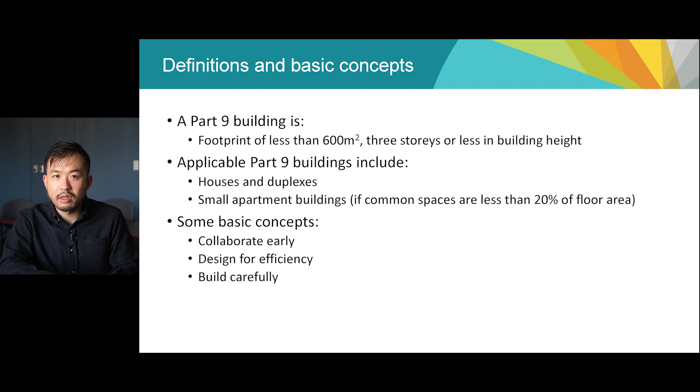An energy-efficient design has windows and doors in strategic places, adequate ventilation, good insulation, and heating and cooling capacity that meets but doesn't exceed the needs of the home. During construction itself, mind the details so there are fewer thermal bridges and air leaks. Seal those air leaks up and watch your corners, junctions, gaps, and studs to reduce thermal bridging. Don't let heat get conducted out of the house.

Here's a summary of the proposed changes for Part 9 buildings. The first is a new prescriptive option for Step 3 only. The second is a series of smaller changes for both harmonization with national codes and additional airtightness testing options aimed for builders of smaller homes. The third is the opt-in building carbon pollution standard.

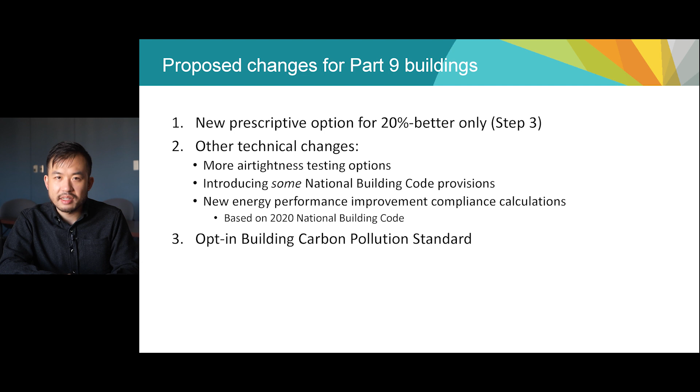Before discussing the differences, I want to clarify what's staying the same. Existing performance-based metrics for steps 3 to 5 are mostly unchanged. There are some minor changes to the metrics, along with some shuffling of tables and new wording to harmonize with the National Building Code. The name of Step 3 and where those requirements are in the code may change, but any builder currently building homes to steps 3 to 5 should transition smoothly to the new requirements, as the techniques and designs are still applicable.

For builders building to the base building code, or steps 1 or 2, those compliance paths will be reserved, which in building code terminology makes them unavailable for use, as they will no longer meet minimum energy efficiency requirements. The performance-based requirements, we believe, will be the most cost-effective in most cases when compared to the new prescriptive option.

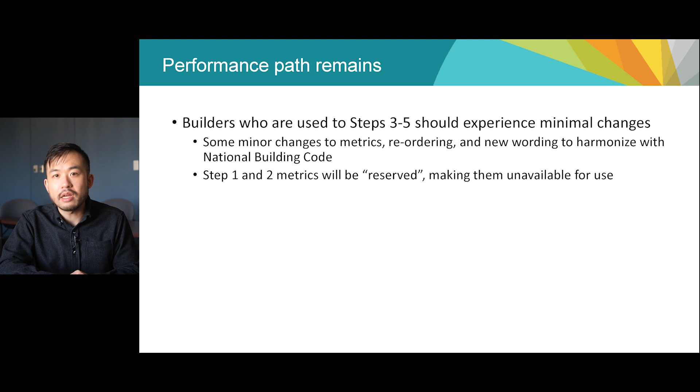Labor market studies, surveys, and conversations with industry have informed us that energy advisors or modelers are available in the most well-populated areas of BC. That means EAs or modelers are available to work on most new construction in BC for a relatively affordable rate. However, we know that that's not the case in every region, which is why we've developed a prescriptive path to achieve approximately 20% better energy efficiency in new buildings.

This prescriptive option is primarily intended for communities that don't have ready access to energy advisors. Northern and remote communities have told us that they have different levels of access to EAs and some high-performance building materials. Most urban centers in BC have access to energy advisors nearby, but in some rural communities it can be expensive for energy advisors to travel long distances to perform airtightness testing. Communities like Haida Gwaii, Saturna Island, and Dease Lake can take time to travel to, even if some of them aren't that far geographically from urban centers.

That's why we're proposing a prescriptive backstop for Part 9 buildings. Builders following this prescriptive path will notice the requirements will be more stringent than current base code requirements. More insulation and more energy-efficient windows and doors will be required, along with mandatory heat recovery ventilators, or HRVs, that operate at higher efficiencies than current base code minimums, with an option to use a heat pump instead of an HRV to lower the home's overall energy use.

These changes to walls, fenestration, and equipment are designed to improve energy efficiency by approximately 20%, without the need for an energy model or airtightness testing. Builders who are concerned about the potentially high travel costs for an energy advisor can see if this option is right for them.

Despite the new prescriptive path, the existing performance-based path will be the easier, more affordable option for most builders, particularly in places with many energy advisors close by. We strongly suggest builders do a cost-benefit analysis before using the prescriptive option, because in many cases, the performance option is more cost-effective while achieving the same energy efficiency goal.

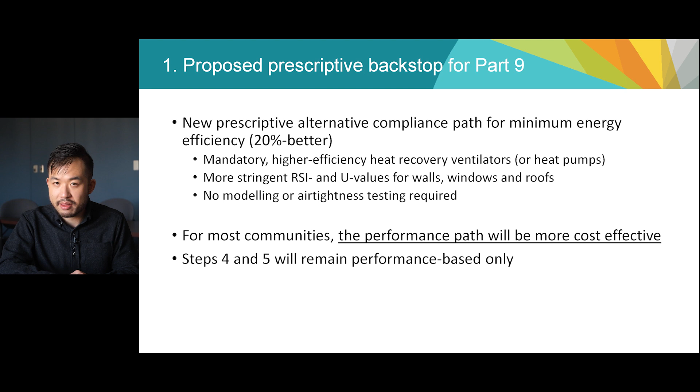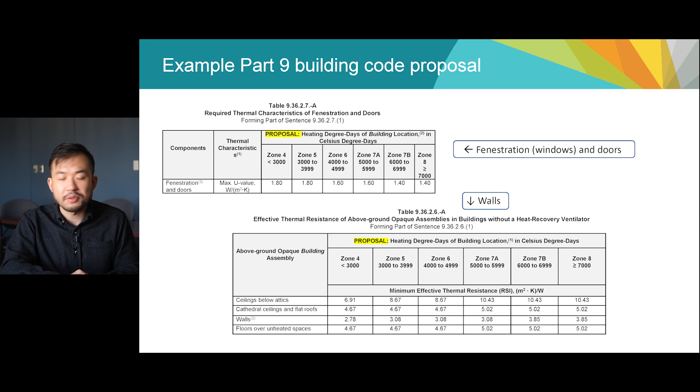These clippings from the code proposal show the new prescriptive values being considered. Notice the higher values in most columns compared to the existing 2018 BC Building Code. Please look over the actual code proposal to examine all the figures.

Before moving on, I wanted to address two building types that won't be part of the current energy efficiency proposal. We've heard that log homes and smaller homes in cold climates have difficulty achieving energy efficiency improvements despite following all the recommended building approaches to improve efficiency in a cost-effective way.

We're conducting research right now in collaboration with industry to see how we can achieve comparable energy efficiency improvements at the lowest cost. This may result in different performance or prescriptive values for these buildings, but that information is not available yet.

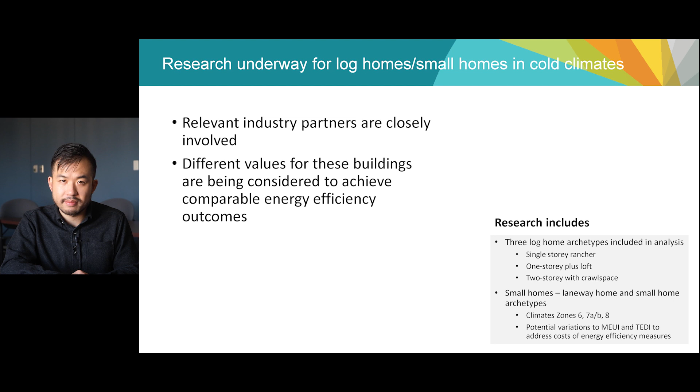So in this proposal, log homes and smaller homes in cold climates will not be expected to meet the performance or prescriptive requirements for other Part 9 buildings. We'll continue the technical research in this area, and we'll update building code users when a solution and code language are ready. Moving on, there are a few smaller technical changes happening to Part 9, which I'll quickly go over.

The new NLA and NLR air tightness testing methods will make it easier for smaller buildings to meet air tightness requirements, because regardless of attention to detail, ACH was a hard method for small buildings to meet, yet quite easy for large buildings, comparatively.

In a first step towards harmonizing with the National Building Code of Canada, we are reformatting some of the tables within the BC Building Code for the % better compliance path for Energy Step Code. This is not adoption of the national points-based approach, but mainly a matter of reformatting.

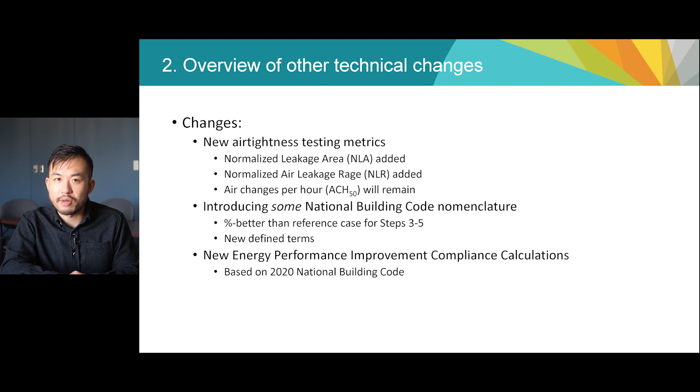Previously, the % better and absolute values were in the same table. Now, they're in separate tables, as they have the NLA and NLR air tightness testing, which we got from the National Model Code. There are also some new % better targets that differentiate between house size and a new energy performance improvement compliance calculation methodology as well. Those are also from the most recent National Model Code. So check out the draft code language for more details.

Finally, a building carbon pollution standard is being proposed for Part 9 residential buildings. It'll be structured similarly to the Energy Step Code, so concepts will be familiar here. It'll have four levels: measure only, medium, low, and zero carbon ready.

Although there are performance and prescriptive options, we did a significant amount of modeling and research and set the specifications such that buildings can generally meet these levels by gradually decarbonizing major systems. So, buildings that meet the medium level typically have one major system decarbonized, either domestic hot water or heat. Buildings that meet the low level have domestic hot water and heat decarbonized, whereas the zero carbon level requires all systems to be decarbonized.

I want to bring up an important distinction. You'll see throughout the code proposals that the phrase zero carbon ready, rather than zero carbon, is written. Now, are they different goals? The short answer is no.

Building codes regulate buildings, not the energy sources that go into them. Utility providers and other parts of government are responsible for requiring and supplying lower carbon fuels to these buildings. In short, we as building code writers make buildings ready for zero carbon fuel. Utility providers and other parts of government provide the zero carbon fuel to finish the job.

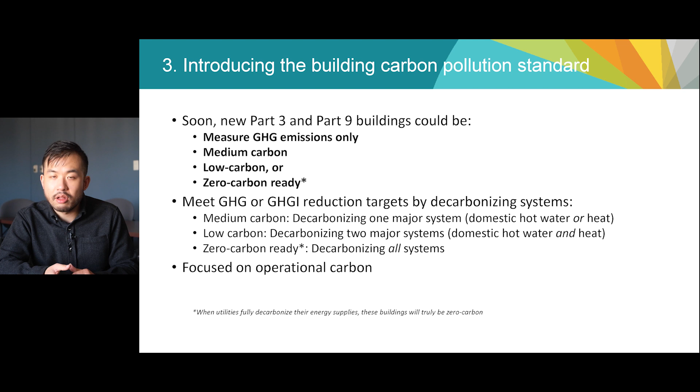If the plan includes on-site renewable energy like solar for a portion of energy consumption, that's factored in too. Before we get too far, I just want to clarify again that this proposal only covers operational carbon. It does not address embodied carbon, which accounts for emissions from all parts of the building's life cycle, from manufacturing of the components to deconstruction.

You'll notice that the implementation of the proposed carbon pollution standard is quite familiar. That's because it was modeled after the approach of the BC Energy Step Code. Local governments can choose the requirements for their community, and builders can meet or exceed those local requirements. Province-wide requirements are expected to increase over time to meet a provincial target, which in this case is zero carbon new construction by 2030.

The difference is that instead of walls, windows, insulation, and other aspects of building design, the Building Carbon Pollution Standard influences the kind of equipment and energy a building uses. It's flexible enough to account for different types of equipment and energy, but it does influence that choice. Local governments may reference GHG levels for buildings in their community in addition to the BC Energy Step Code in their bylaws or development permit authorities.

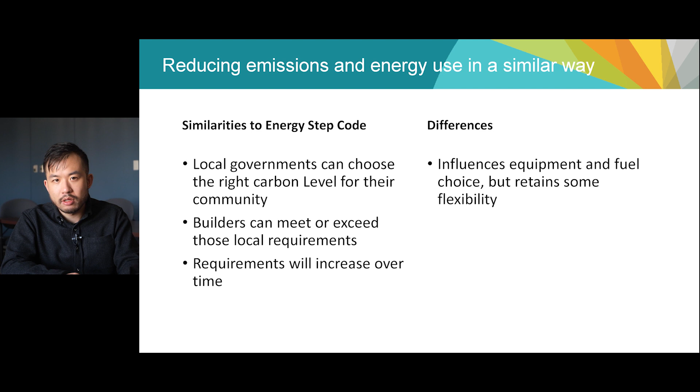Some communities have introduced a step-up, step-down approach for local builders, where the base energy efficiency requirement is high, but it could be relaxed if a low-carbon energy system were installed. While this incentive structure can continue under the provincial code proposal, we're providing additional tools to local governments to require carbon pollution reduction in buildings and create options for those who want to include dual fuel solutions. As a reminder, any technical building requirements, including any carbon or energy efficiency related requirements that conflict with the new Building Carbon Pollution Standard, will have no force or effect if this code proposal takes effect.

I'll quickly recap some key terms I went over in episode 2. We use a common figure called CO2 equivalent, or CO2e, to represent the multiple types of greenhouse gases emitted from burning fossil fuels. It accounts for their different warming effects and life in the atmosphere. Building emissions will be measured using two metrics: greenhouse gas emissions on an annual basis in kilograms, called total or absolute GHG, and the kilograms of CO2e emitted per meter squared of heated floor area, called greenhouse gas intensity, or GHGI. The reason why we're using both will become clear in a moment.

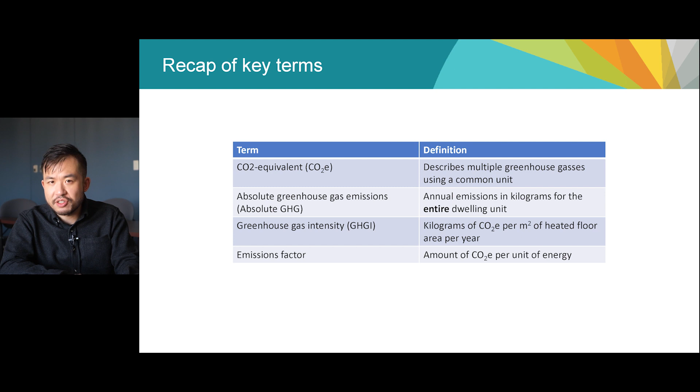Finally, an emissions factor is assigned to each type of energy that's used in the building. It estimates how polluting each energy source is. There will be a lot more information on this in just a bit.

We're proposing a hybrid approach for Part 9 buildings, which uses both total GHG and GHGI, instead of just relying on one or the other. We felt each had their pros and cons, so using both would give us the best of both worlds. For example, GHGI targets are relatively easy for medium and large dwelling units to meet, but quite hard for small dwelling units to meet. Total GHG targets, on the other hand, are easier for small homes to meet, but medium or large-sized dwelling units would have a hard time even if they only used a grid-scale, low-carbon energy source.

What we're proposing is not exactly the straight 6/3/1 GHGI approach that's already in use in some areas, but rather one that creates a base GHG allowance for each dwelling unit. If the unit falls under the base allowance, great. We did the modeling and set the allowances such that most small homes could meet them. That provides a decarbonization target that they can meet. Medium and large dwelling units are unlikely to meet these base allowances, so there's a path for them too.

Buildings that exceed the base allowance must not exceed a GHGI target by floor area, and they also have to fall below an emissions cap. Let's dig into that a bit.

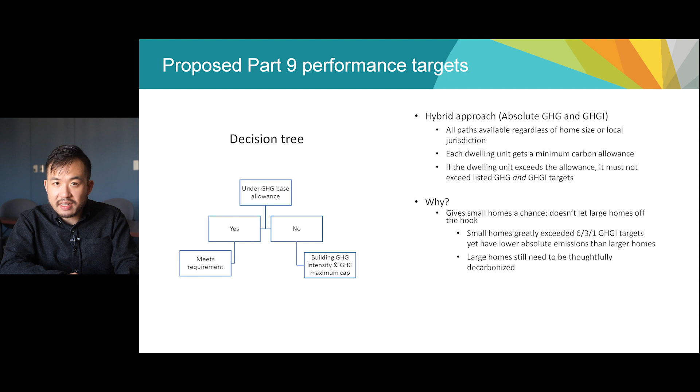These are the greenhouse gas tables we're putting out for public review for Part 9 residential buildings. The GHG emission compliance options would be applicable to any size Part 9 residential building, but the choice of compliance option would be heavily influenced by the size of the home. The numbers have been set so that small homes would most likely be built to the column with the entries

1050, 440, and 265. Medium and large size homes would meet the GHGI of either 6, 2.5, and 1.5, and would be restricted from emitting any more than 2,400, 800, or 500 kilograms of CO2e per year, depending on the GHG level chosen. You can also see a prescriptive backstop for Part 9 GHGs in the column on the right, which is in part to recognize that homes that follow the prescriptive path for energy efficiency won't have modeled GHGs. Yet it can be an effective way for places with few energy advisors to lower their emissions too. Our modeling has shown that this will generally result in the desired outcome.

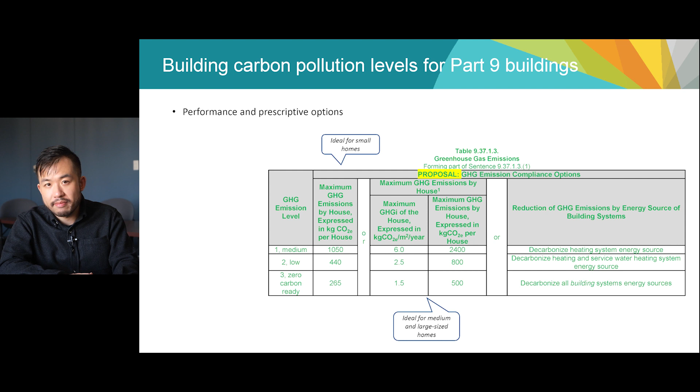There are a lot of technical details that will be relevant to building designers to ensure the building complies with the requirements. These are some of the high-level points. The word house is a defined term, which includes a main dwelling unit and, if applicable, a secondary suite. The term house can also mean a unit of a duplex or a two-bedroom unit of a small apartment building. If a building has more than one dwelling unit, each dwelling unit is to meet the specified emissions requirements. The whole building will be modeled, but the targets are for the units, not the whole building.

The Building Carbon Pollution Standard does not regulate so-called luxury loads, such as hot tubs, pools, and heated driveways. Some local governments may wish to explore other methods of reducing the energy use of these luxury loads, including using their development permit authorities for energy conservation and GHG reduction.

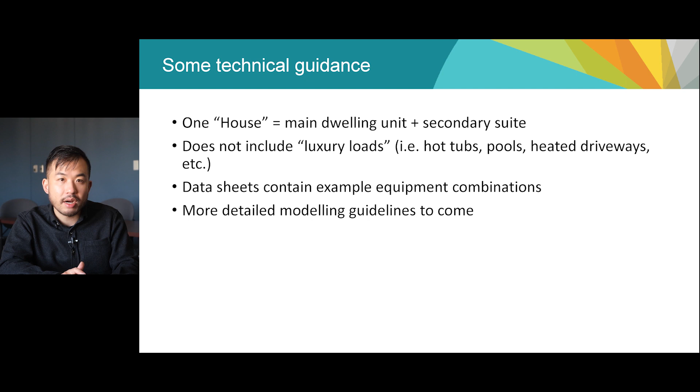This is a very high-level summary of the details that go into evaluating the carbon pollution of a home. The details will be in a modeling rule set which is currently being developed. But for some more information about assumptions and modeling, take a look at the data sheets included in the supplementary material. On the topic of energy modeling, it may be useful to go over how modeling and other energy sources are included in the Building Carbon Pollution Standard.

As a note, this slide is identical to the slide on the same topic in the Part 3 buildings presentations. So if you've seen or listened to that one, just skip ahead a little bit to the next slide.

Measuring carbon emissions from buildings requires a set of energy modeling guidelines, which describes how emissions intensive each energy source is. In other words, it assigns an emissions factor for every unit of energy, for example, 0.011 kilograms of CO2e per kilowatt hour. These factors are a snapshot in time and are a sophisticated estimate, but they don't always reflect the true emissions of an energy source because emissions can fluctuate.

For example, most electricity customers in BC are connected to the integrated electricity grid, which is supplied mostly by hydroelectricity and at least 93% clean by legislation. But there are times when emissions change if the utility purchases higher carbon energy to supplement the hydroelectricity supply when customers are using more power. Although there are plans to make the integrated grid 100% clean in the coming years, the emissions factor still fluctuates.

As of August 2022, our partners in the building sector have told us that a stable and predictable building code, where specifications remain the same for several years at a time, is important because buildings take years to design and build. If requirements changed all the time, design and costing estimates would change too. So, to provide some certainty and stability for builders when utilities are rapidly decarbonizing, the proposed Building Carbon Pollution Standard will base its performance levels on emissions factors set by the City of Vancouver's energy modeling guidelines. We're doing that because this approach is already in place in many BC communities, so it's familiar to the industry, and it'll help them transition from existing local GHG policies without the sticker shock of different GHG values from what they're used to.

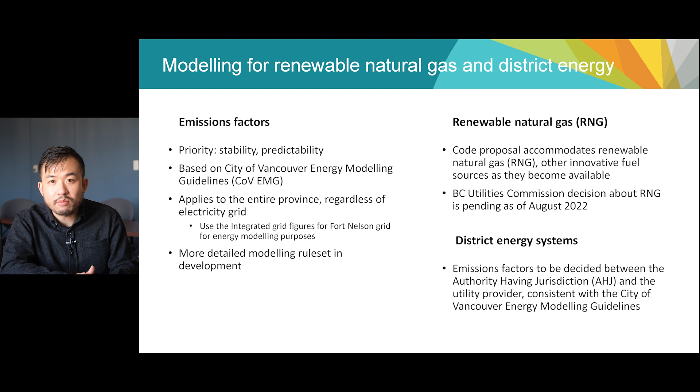Regarding district energy systems, which distribute thermal energy like steam to multiple buildings in an area or neighborhood, we think there's too much variability in specific systems used in BC for any single solution, as emissions vary by the fuel source of these systems. That flexibility is what makes district energy so attractive, but it does pose some challenges when trying to create a provincial solution. We've heard that local governments prefer to leave any decision of emissions factors between them and the district energy provider. So that's what we're proposing. It's consistent with the City of Vancouver's energy modeling guidelines too.

This wraps up episode 4. The next episode, which concludes the series, summarizes some practical suggestions for different sectors, designed to increase the chances of a smooth rollout for everyone involved. See you there.